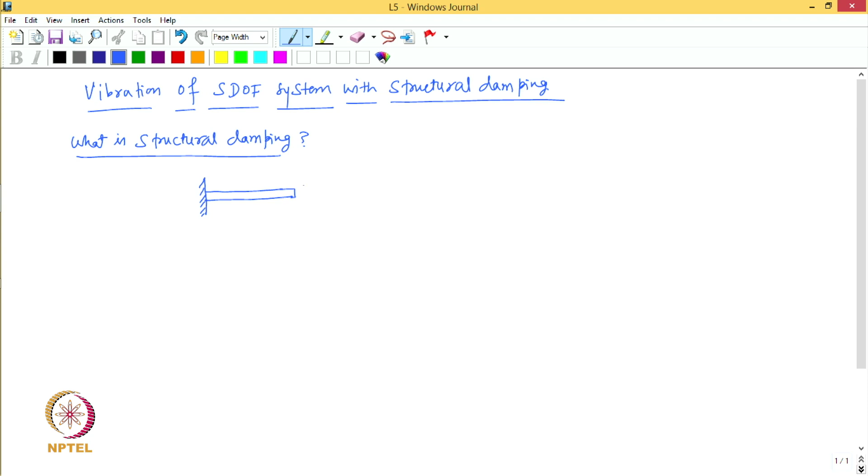So, what is structural damping? Let us try to answer this question first. Let us take a simple example. Let us say we have a cantilever beam like this, and let us say it is disturbed and it is vibrating under free condition, right. So, if you consider the free vibration of this beam, then we see that the vibration amplitude continuously decays like this, and the vibration becomes 0 after a certain amount of time.

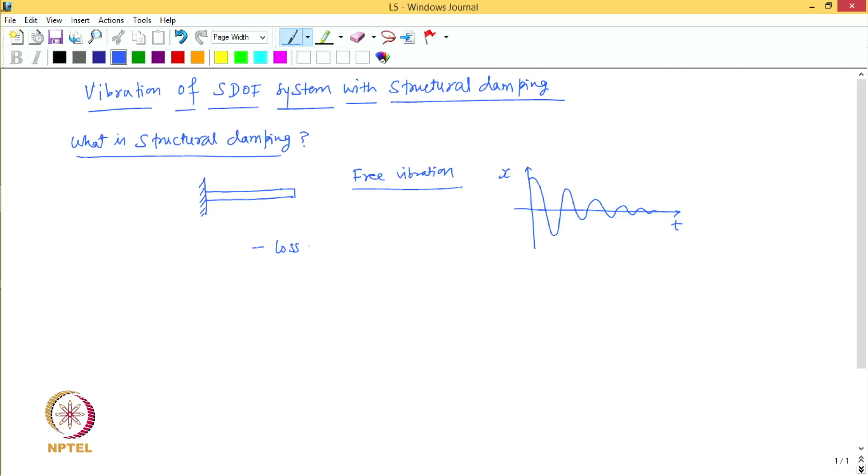So, in this case the energy loss due to viscous forces and due to dry friction is negligible. But then what is the source of energy loss? The main source of energy loss in this case is loss of energy inside the material. Okay. So, there are some damping forces acting inside the material which are causing energy loss. So, there is loss of energy inside the material, or structure.

Now, this loss occurs due to work done against molecular friction, and there are some complex processes which occur when material deforms, and therefore work is done against these forces, which causes the dissipation of energy. And this is basically called structural damping.

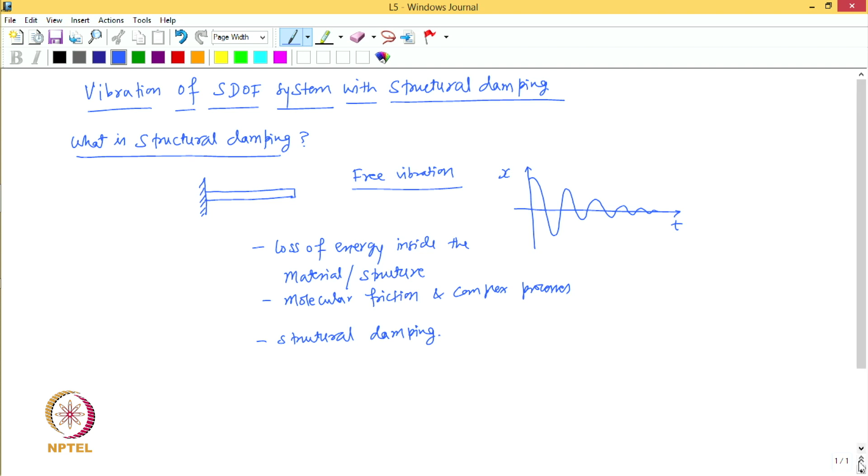So, what is the evidence that such an energy loss occurs inside the material? If we perform a cyclic loading test of a structure, and let us say we again take this bar subjected to a cyclic load like this, f of t, and we apply a harmonic force like this, f naught cos omega t, and if at any point we draw the stress versus strain, then it is seen that

when the load increases, let us say this is the path being followed when the load is applied, and when the load is reduced or withdrawn, it follows a different path like this. Okay. And when the load reverses direction, it goes in this direction, and again when the load is increased, it follows this kind of profile. So, this path is continuously repeated. It forms a closed loop, and this is called hysteresis loop.

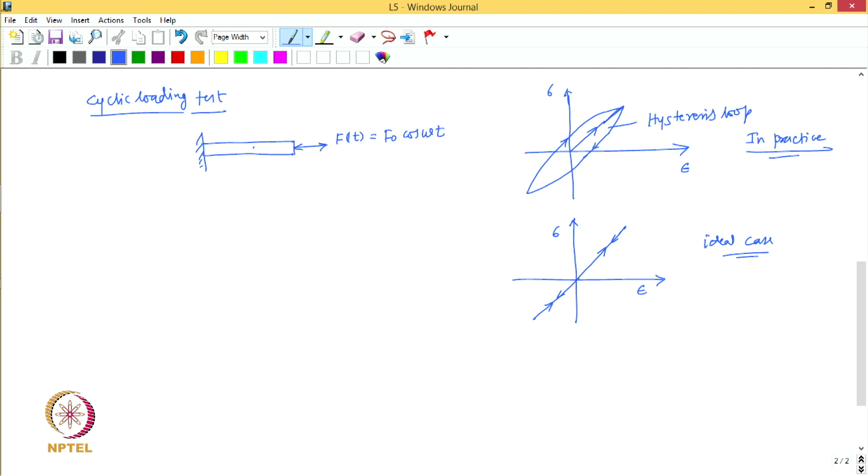So, in practice what we see is that a hysteresis loop is formed by the stress strain plot, and this occurs because there are energy dissipating forces inside the material, because of which there is a phase lag between the stress and strain, and this phase lag is responsible for the paths followed during loading and unloading to be different, and the area of this loop represents the energy loss. Okay. So, the area of the hysteresis loop represents the energy loss per unit volume.

So, the area of this loop represents the energy loss per unit volume, and that energy loss occurs to perform work against the dissipative forces which resist the deformation, and this is nothing but the evidence of existence of structural damping. That is why structural damping is also referred to as hysteretic damping or internal damping, because this damping arises due to energy loss internal to the structure.

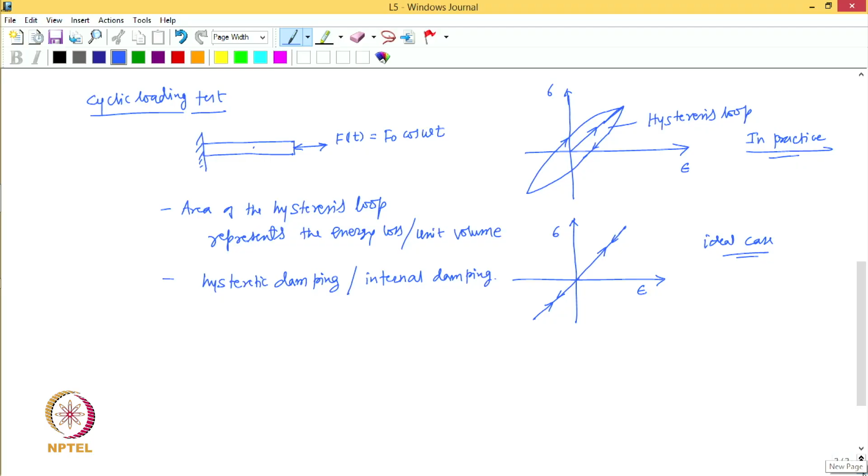So, now how can we quantify structural damping? Let us go to the next page. Quantification of structural damping. Structural damping is quantified based on the energy loss which occurs in a cycle. So, an index is defined called loss factor, represented by eta, and eta is equal to the energy dissipated per unit radian of the cycle divided by the energy at the beginning of the cycle.

So, here ED is the energy dissipated in a cycle, right, and U is the energy at the beginning of the cycle.

So, therefore, loss factor tells the fraction of the total energy the system possesses which is lost by the system while vibrating, per unit radian of the cycle. Okay, the fraction of the total energy lost per unit radian of the cycle, that is nothing but the loss factor.

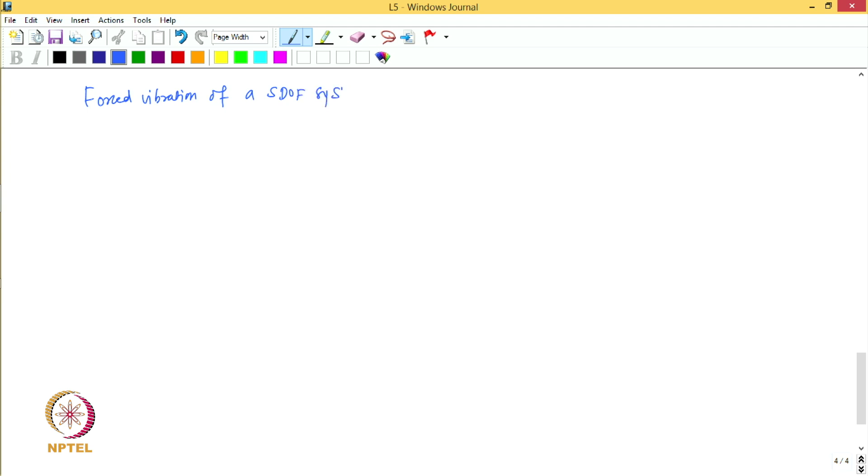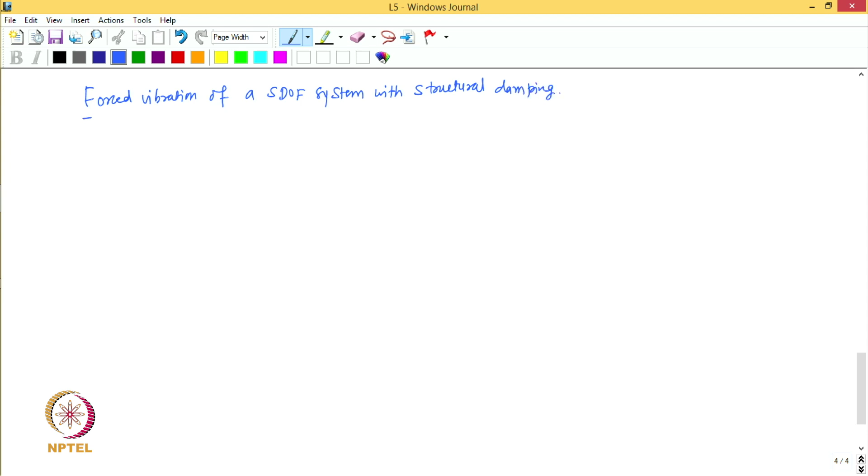So, now with this introduction of structural damping, let us consider a single degree of freedom system with structural damping. First we consider the forced vibration of a single degree of freedom system with structural damping. To write the equation of motion for this system, we require the knowledge of the structural damping force.

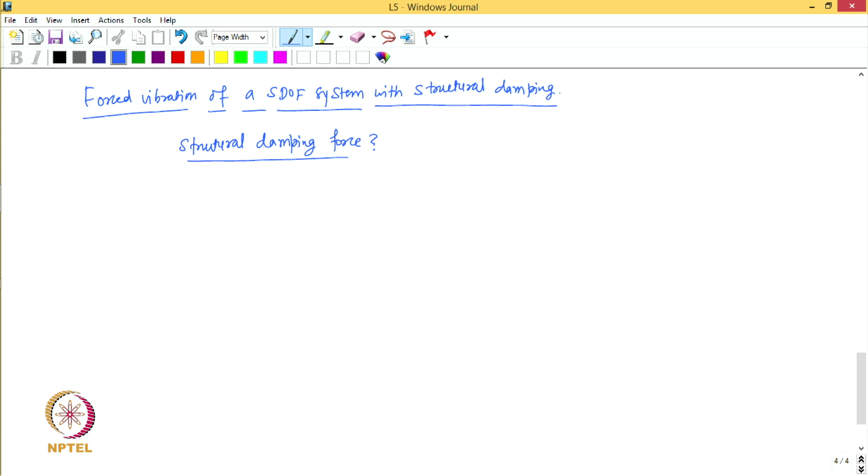And in the absence of any suitable model to quantify the damping force due to hysteretic damping, what is done is that we try to define what is called the equivalent viscous damping coefficient, and from that we work out the damping force, because for a viscous damping model we know the damping force. So if we can define an equivalent viscous damping coefficient for a system with structural damping, we can determine the damping force.

So, therefore, we try to define what is called the equivalent viscous damping coefficient. And this is defined based on equivalence of energies, which means we determine how much energy is lost in a cycle when structural damping is there, and how much energy loss occurs if viscous damping is there, and then we equate these two energy dissipations to arrive at the equivalent viscous damping coefficient.

So, let us first consider the energy loss in structural damping. I represent it by E_dH, H for hysteretic. This represents the energy loss per cycle with structural damping.

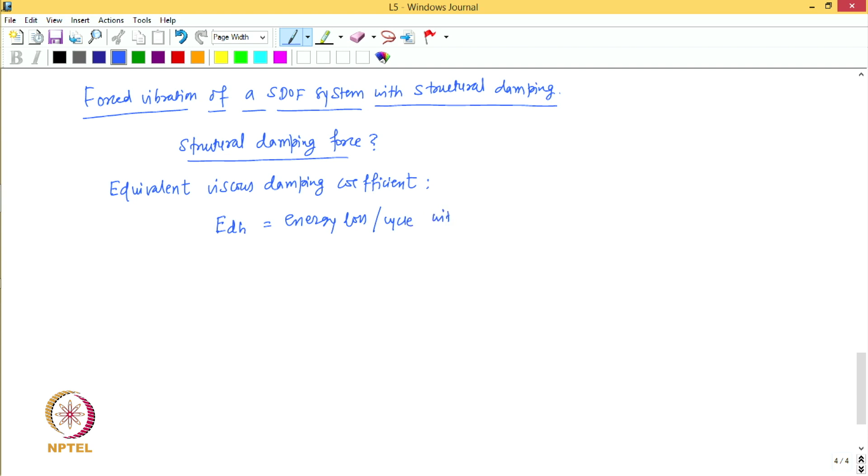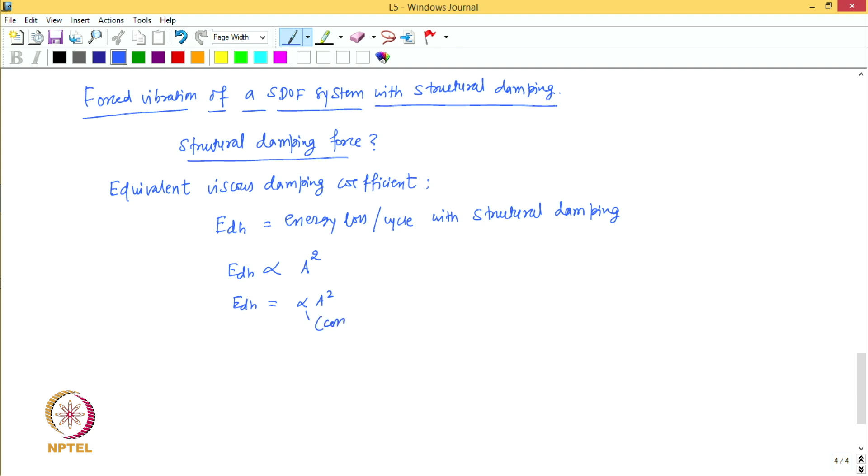Experimentally it is found that this energy loss E_dH is proportional to the square of the amplitude of the displacement, and it is not dependent on the frequency. If you change the frequency of the loading, that energy loss does not change. Therefore E_dH can be written as alpha times A squared, where alpha is the constant of proportionality. This is the energy loss expression for a system with structural damping.

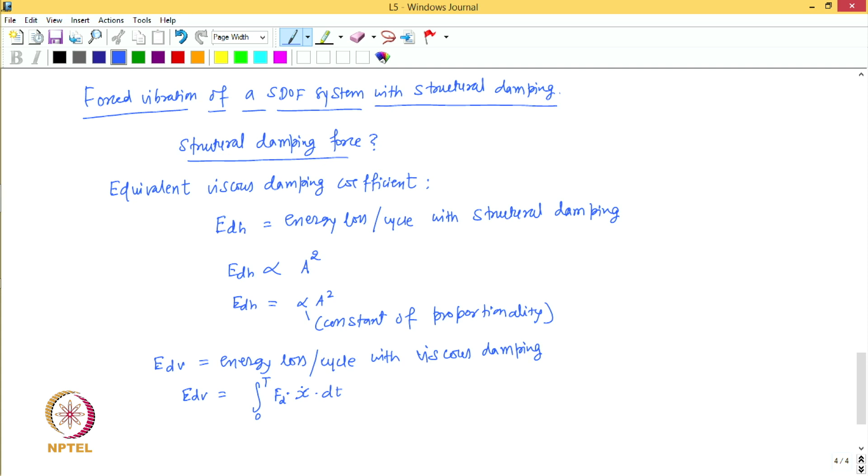Similarly, we would like to work out the energy dissipated when viscous damping is there. Let E_dV represent the energy loss per cycle with viscous damping. This energy loss can be found as the integration of force into x dot. Damping force into velocity is the power loss, multiplied by dt, and integrated over one time period of the vibration cycle gives the energy lost in viscous damping. And we know that F_d is the damping coefficient multiplied by x dot, into dt.

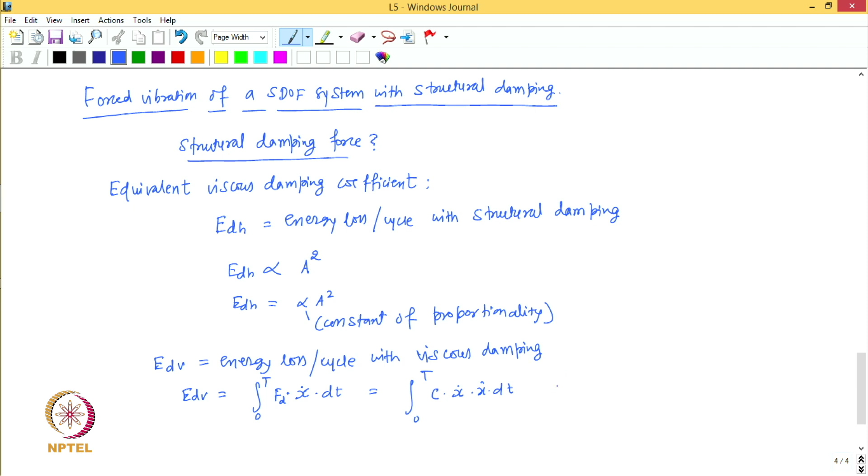So, we need to find this integral. Let us go to the next page. If we assume the displacement x(t) is given by A cos(omega t minus theta), describing the vibration of the system with viscous damping, then substituting x(t), differentiating to find velocity, integrating with respect to time and applying the limits, we get pi c omega A squared. This shows that the energy loss due to viscous damping is proportional to the square of the amplitude, but also proportional to the frequency of vibration omega.

Now, to define equivalence, we equate E_dV equal to E_dH, the two energy dissipations per cycle. Substituting the expressions for both, we get alpha A squared, and this gives us C equal to alpha upon pi into omega. And if we represent alpha by pi as h, this C is what we call C_eq, the equivalent viscous damping coefficient.

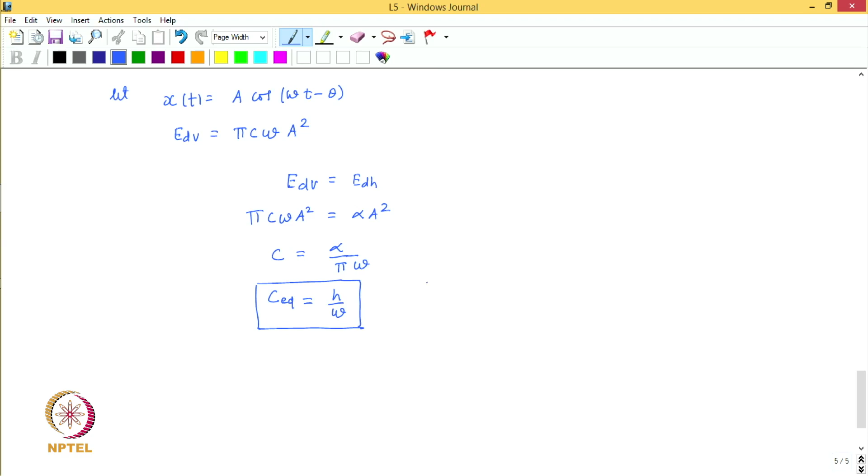That is what we get. Okay. So, CEQ is nothing but the equivalent viscous damping coefficient, and H, which is equal to alpha upon pi, is referred to as the structural or hysteretic damping coefficient.

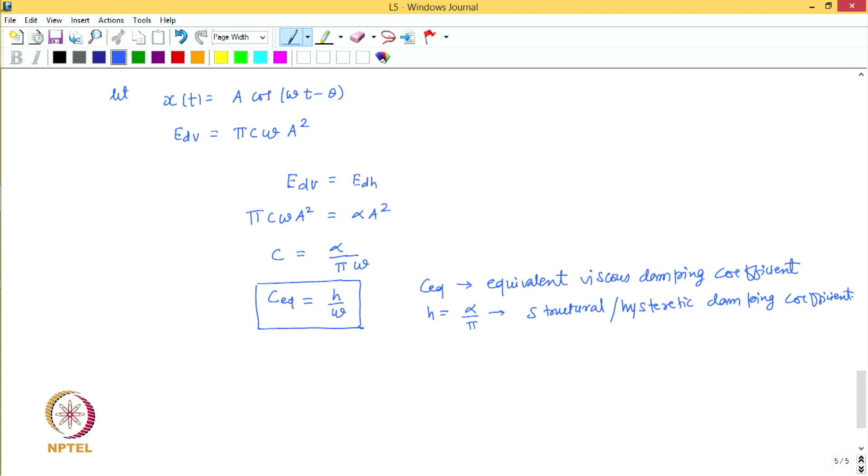So, we see that the equivalent viscous damping coefficient is dependent on frequency omega. So, now with this definition, we can determine the damping force, because if the equivalent viscous damping coefficient is CEQ, the equivalent viscous damping force would be simply CEQ into x dot. So, this allows us to basically write the equation of motion. So, let us go to the next page.

So, now for a system with viscous damping, we can write the equation of motion as m x double dot plus c x dot plus k x is equal to f of t, whatever the force is given. So, this is the equation of motion, and this is true for any f of t, which means it can be a harmonic force, a non-harmonic force, a periodic force, an impact force, any force. This equation is true.

But now we cannot straight away use this equation to find an equivalent equation for a system with structural damping, okay, because the equivalent coefficient that has been defined is at a certain frequency omega. Therefore, what we do is that we first take a Fourier transform of this equation. Of course, Fourier transform we will study in more detail in a later lecture.

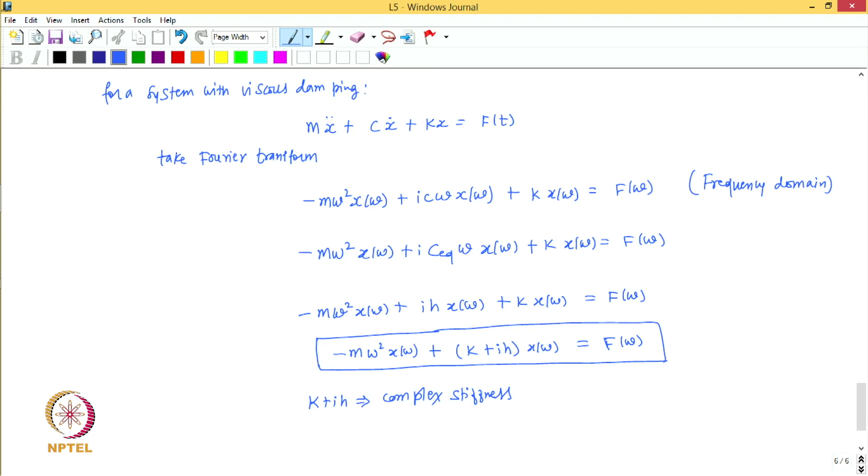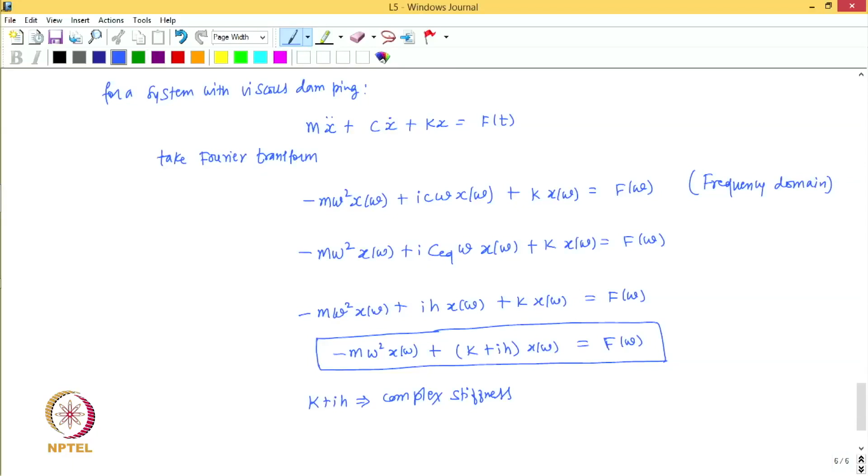So, complex stiffness takes into account the force due to the stiffness plus the force due to structural damping. And so now, in order to find the steady state response, we can simply obtain that as f of omega upon k plus i h minus m omega square. So, that becomes the amplitude of the steady state response, which is the complex amplitude.

So, let us say a harmonic force, f of t equal to f naught e to the power i omega t, is acting on the system, and then the response x of t will be equal to the real part of the amplitude times e to the power i omega t. Of course, let me correct this: the harmonic force is equal to the real part of this, which actually is nothing but f naught cos omega t. So, if f of t is the real part of f naught e to the power i omega t, then the response will also be the real part of x of omega e to the power i omega t.

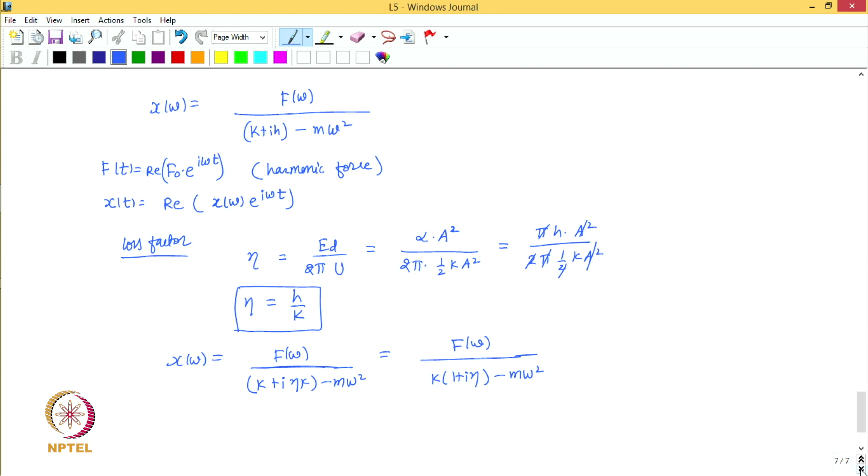So, therefore, we can modify x of omega as k plus I eta k minus m omega square, right, is equal to f of omega upon k into 1 plus I eta minus m omega square. So, now we can substitute this expression in the equation for x of t and then obtain the final expression for the steady state response.

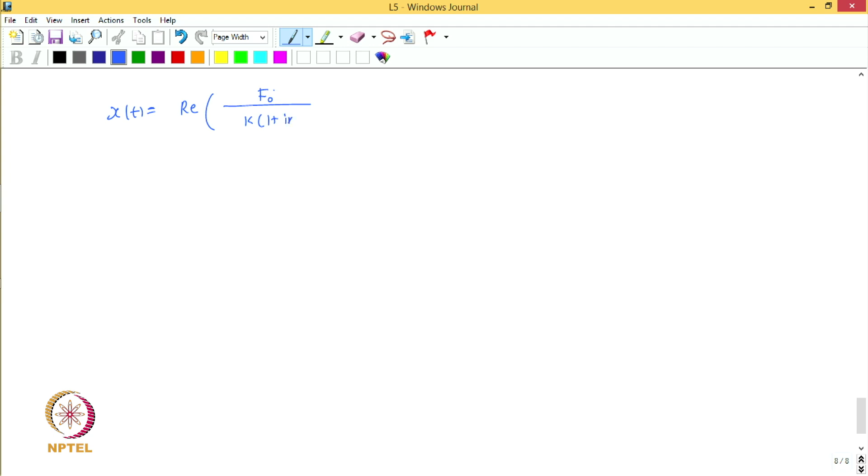So, we have x of t here, which is f naught upon k into bracket 1 plus I eta minus m omega square into e to the power I omega t. So, if you multiply and divide by the complex conjugate of the denominator and then simplify, the final expression would be this f naught. We can also divide by k and replace k by m omega n square. If all that is done, then the final expression would look something like this:

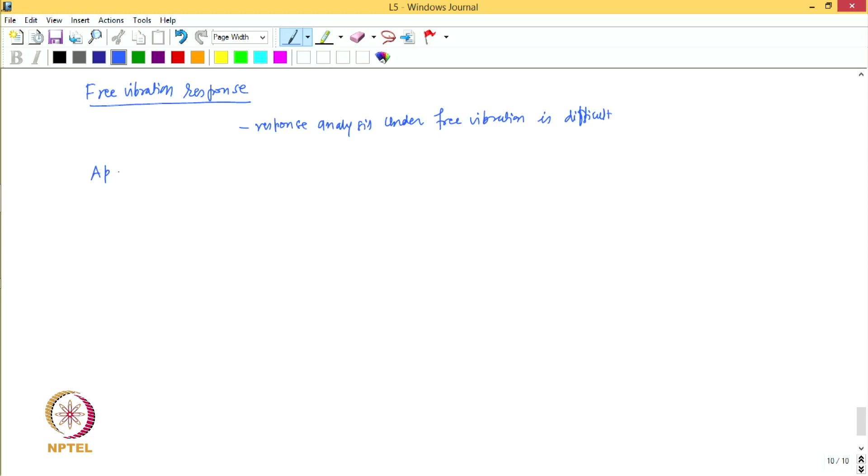So, therefore, response analysis under free vibration is difficult, because a suitable model for representing the damping force using structural damping is not there. So, is it possible to define what we can call an equivalent system with viscous damping? Can we approximate or define a system with structural damping by a system with viscous damping?

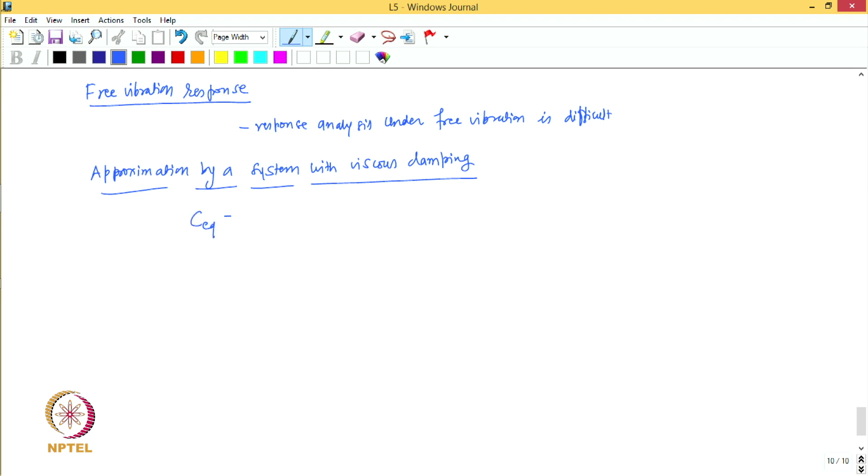Right. So, because time domain response analysis is difficult, can we explore the alternative of representing a system with structural damping by an equivalent system with viscous damping, because a viscous damping system can be analyzed in the time domain? To do that, we already found the equivalent viscous damping coefficient C_EQ equal to h by omega, and we also found that eta is equal to h by k. So, in place of h, we can write eta k by omega.

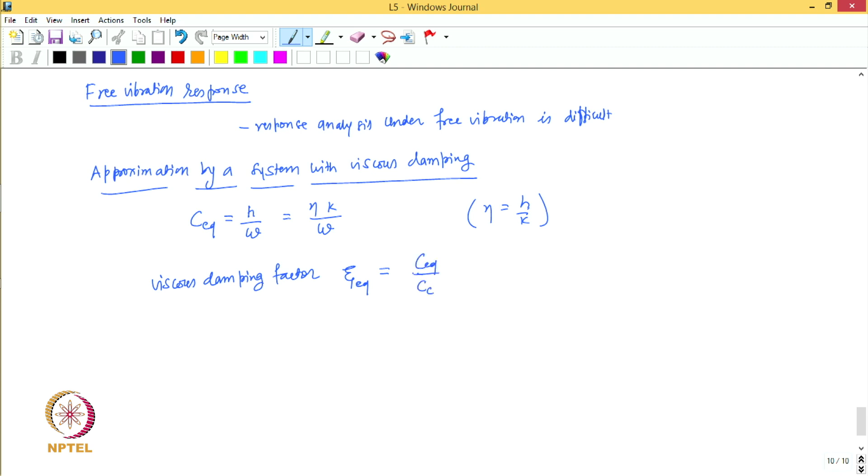Now, if we define an equivalent viscous damping factor zeta_EQ equal to C_EQ upon the critical damping coefficient of the system, C_EQ is eta k upon omega, and C_C is 2 root k m, which gives eta root k upon 2 root m omega, and therefore zeta_EQ can be written as eta omega n upon 2 omega. So, the equivalent viscous damping factor for a system with structural damping having loss factor eta is eta into omega n upon 2 omega.

And what we see is that such an equivalent system with viscous damping should have a damping factor which depends on the frequency of the motion. So, if we want to study the motion at frequency omega, the corresponding equivalent viscous damping factor depends on this value of omega, and therefore for every omega there will be a different viscous damping factor, or the equivalent system would be different if the frequency omega of the study changes.

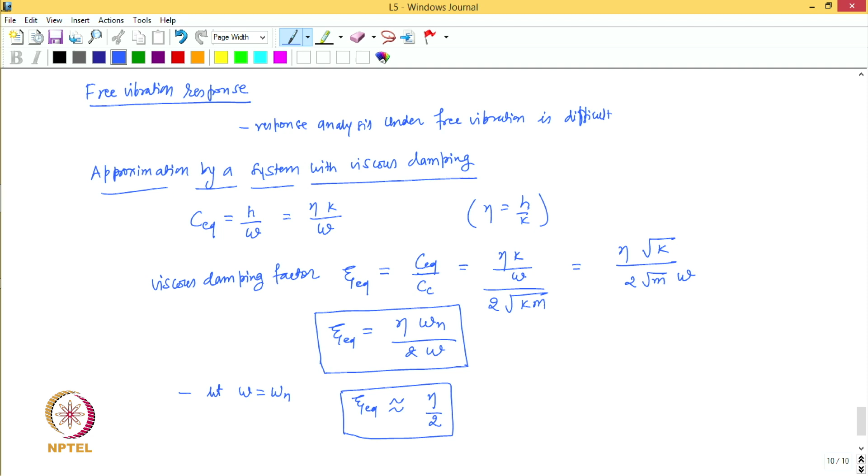Because damping is dominant at and around the resonance frequency, let omega equal omega n, meaning the frequency of motion matches the natural frequency. Taking that frequency, zeta_EQ can be written as eta upon 2. This equivalent can be used over the whole range of frequency, though there will be some error because it is only an approximation. So, if the loss factor is eta, the equivalent viscous damping factor would be eta by 2.

So, in this manner we have now studied today the vibration of a single degree of freedom system with structural damping. We can now stop here.